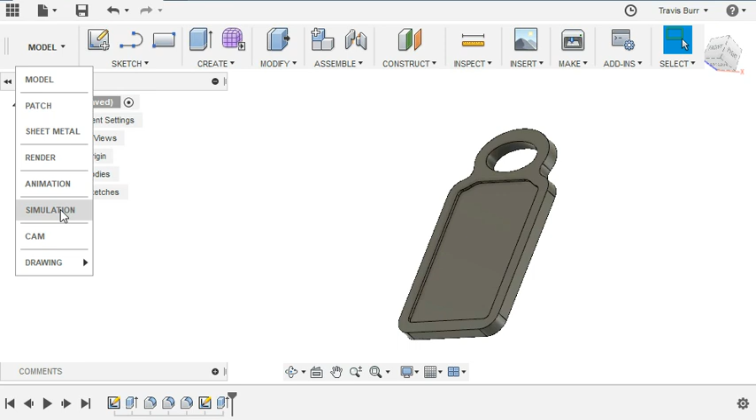The next step of the CAM process is to start generating some tool paths and things to make this, or to cut this cutting board out. What I'm going to do is go to Model and select CAM. You'll notice this right away changes over all of my toolbars, so I've got a whole new scope of Fusion 360.

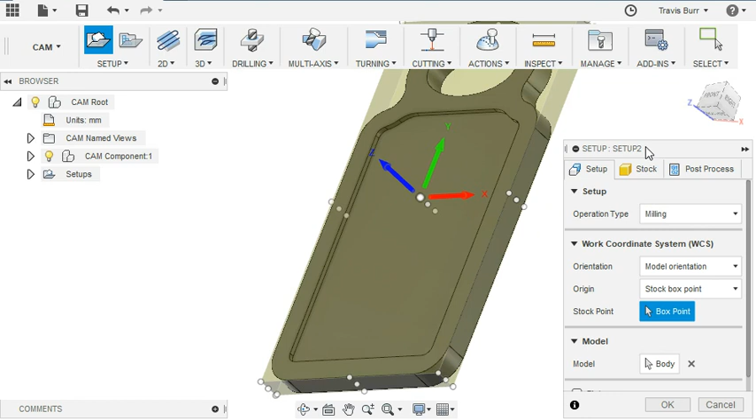Now, first thing I need to set up is the material that you're going to be using. I'm going to double click on Setup and it's going to bring up this box. First thing, type of operation: milling, that's using our router; turning, that's using a lathe; and cutting, that's laser cutting, water jets, things like that. But we're milling, so we can just stick to that one.

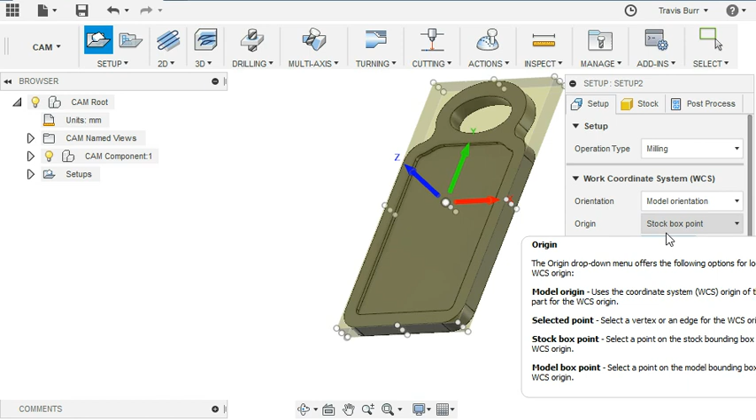Now, work coordinate system, model orientation. You've got some other options there, but we'll just leave it as model orientation. And stock point — this is where we want the XY to start. Remember when we were drawing it, we used this point down here. I can click on that, and it's going to move that point there, so I know when I'm zeroing the machine, I need to zero it on the corner of my wood. That lines everything up. For Model, I could have just clicked on model body, which would have set this up the same way.

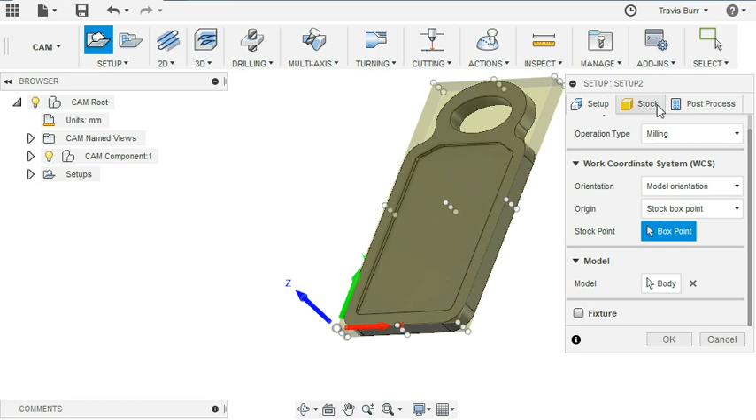Next thing, I'm going to go over to Stock. Now it says relative size box — I'm going to set this to a fixed size box. It just changes the dimension a little bit, but now I can see that my width is 180. Well, I know that my stock's 190, so I can just update that.

It says my y-axis, my depth, is 340. I'm going to just leave that as is for the time being. And it says my z height is 20, but I know my depth, or my z height, is going to be 19, so I can update that as well. You can see everything's centered — model position is centered, meaning the model is centered within the stock.

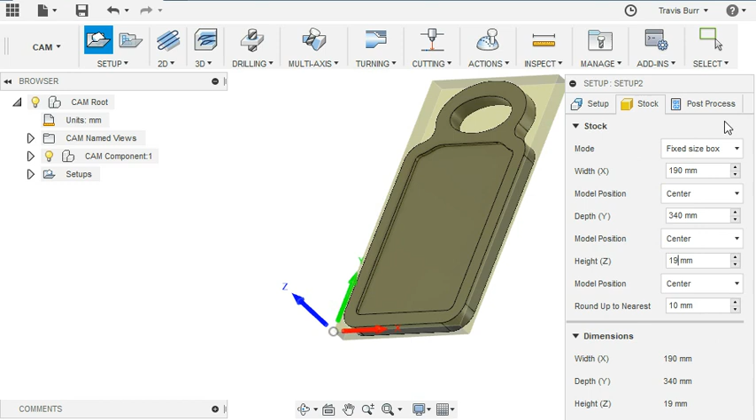We're not going to worry about post-processors right yet, and I'm going to hit OK. So now I've got my setup, I've got the material in place.

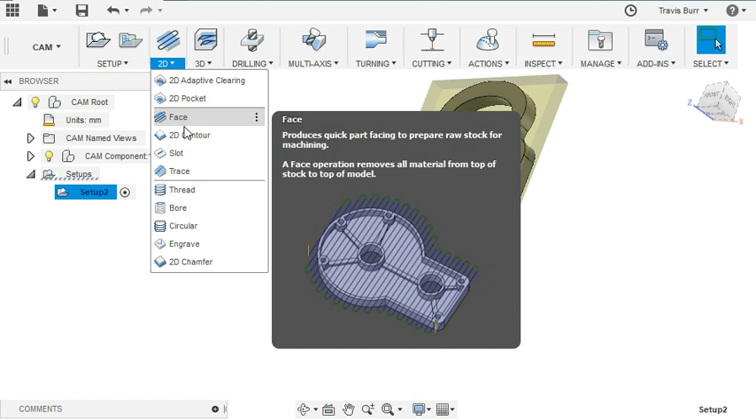After setup, we need to take a look at the tool paths. If I click on 2D, I've got a whole bunch that we can use: 2D adaptive clearing, pocket, face, contour, slot, trace — a bunch of different things that we can do. I'm going to start off with just a 2D pocket. This is a very simple CNC operation. If I click on that, it's going to bring up another window.

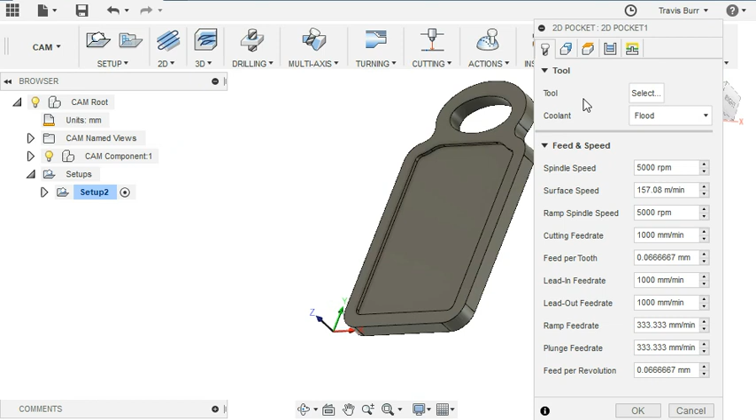It starts at the tool, and we're going to work our way down. For the tool, I'm just going to click on select, and that's going to bring up this dialog box. Now there's a whole bunch of predetermined setups that we can use, but it's all for metal — we're going to be using wood. So I'm just going to click on the plus for new mill tool, and that's going to bring up this dialog box.

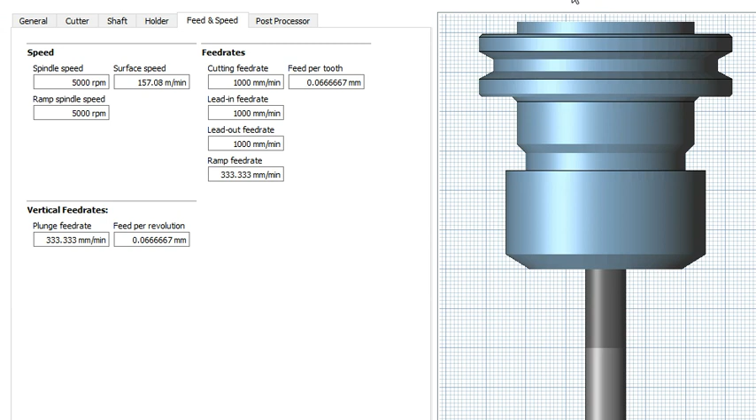So we'll start over at the cutter and identify what the cutter is that we're going to use. We're not using a ball mill, we're going to use a flat end mill. A lot of the ones we've got in the wood shop right now are single flute bits, so I'm just going to set that to 1. Our units are millimeters, I don't want any coolant, and we're using high-speed steel — there are other types you can use, but we're using high-speed steel.

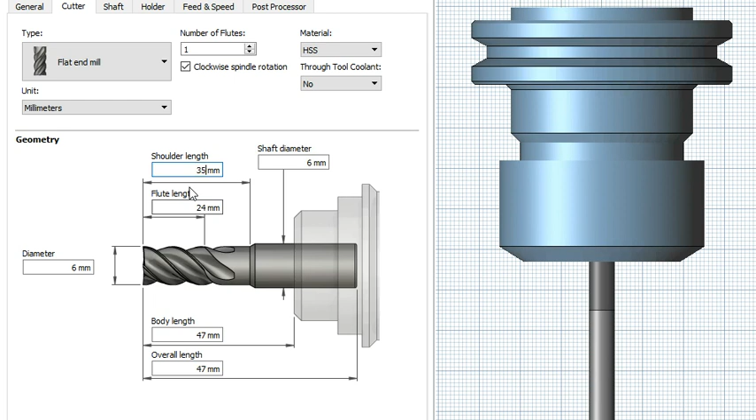The diameter of the bit we're starting with is going to be 6 millimeters, so I can just change that. The flute length on this bit is 24 millimeters, and the shoulder length is 35 — just a basic setup of what our bit looks like. You'll see over here on the tooling it updated as I made these changes. Say you want to make a change, maybe I got this wrong, it's 16 — you can see right away that it's changing size. So this is just identifying what the bit looks like.

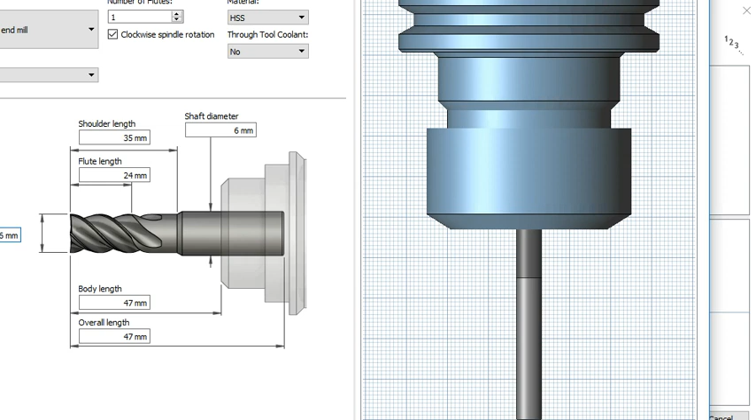With all of that set up, I'm going to move over to feeds and speeds. Now Fusion tends to set things up for metalwork right away. We're going to bump up the 6 mil bit to 20,000 RPM, which is really fast, but our machine's capable of it. If your machine's not capable of that sort of RPM, make sure you're setting this to what your machine's capable of.

The cutting feed rate that we've been cutting with on our machine is 3,000 millimeters per minute, and that's giving us a feed per tooth of 0.15. That's about what we're looking for, but if you're using a smaller hobby machine, you might want to bump that down a bit to like 0.05. The machine we're using is quite powerful, so these settings are fine.

If you're a little hesitant, you can also turn your feed rate down to a lower number. Say if I was using 10,000 RPM instead of 20, I would set my cutting feed rate at 1,500. If I had this down to 5,000 RPM, I would be setting 1,000 millimeters per minute. So there's some changes here, but for the machine I'm using, our Omni with a 6 kilowatt spindle, 20,000 RPM is fine, 3,000 millimeters per minute is going to work, and 0.15 millimeters feed per tooth.

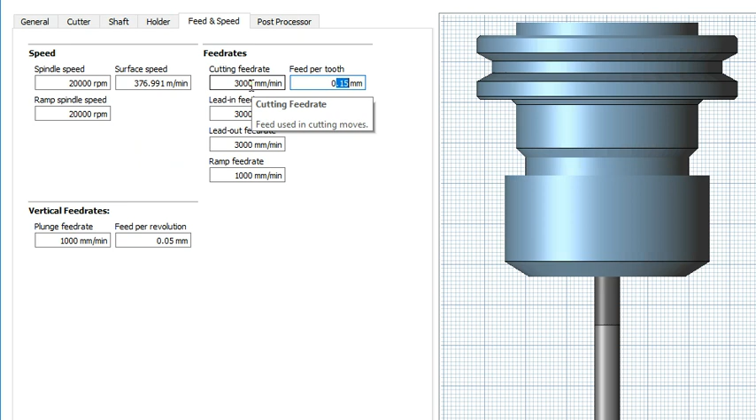But if you want to be safe, slow this down to what your machine's capable of, and slow your cutting speeds down. If you really want to test this out, you can start off with 1,000 millimeters a minute and just try a couple cuts, ramping the machine up as you get used to it.

Once this is all done, I'm just going to go OK. We're going to save that tool to our project, and hit OK again. Now you can see that the tool is showing up here.

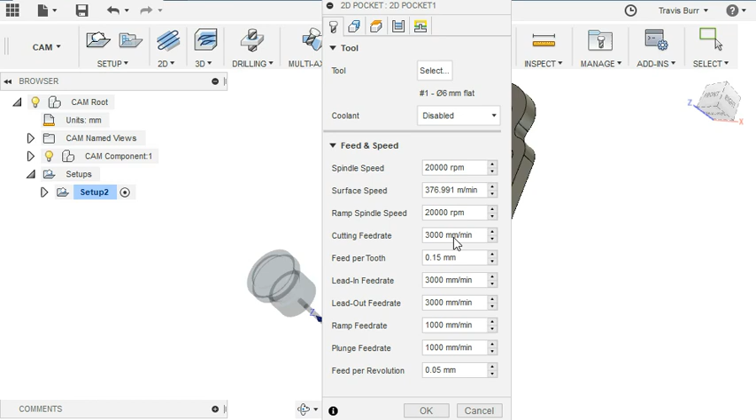Looking at our window here, I've selected my tool, check. We're using a wood router, and we don't need any coolant, so we'll just turn that off. Our feeds and speeds are set from that last operation we just did, so I'm not really concerned with anything here—just a brief check over. We've got our spindle speeds correct, what we just set, and our cutting feed rate set, so we're good here. We can move on to our next tab.

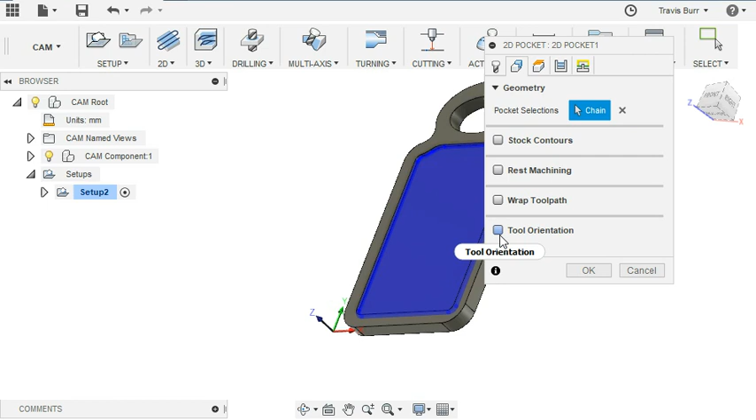Now our next tab is geometry. It says pocket selection, nothing is selected, so I need to select some geometry. If I come in here and click on my pocket, it says chain, and it selects everything that I need to do, which is good. That's what I want. You've got some other options here, but we're not going to worry about those right now—that's for another tutorial down the road.

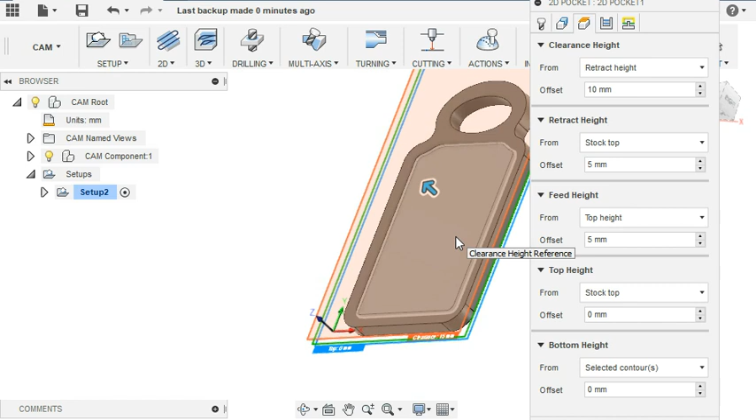Next tab over is my heights. It's kind of funny—everything else is top to bottom, but here you need to think bottom up. So bottom height, this is the depth we're cutting down to. Remember how we did this extrusion to 4 millimeters? We're going to set it to the bottom of that. I'm going to say selection, zoom in, and select the bottom of that, and you'll see the bottom now is at -4. So it's gone from the top down to the level we want. We could change this depth depending on what we want to do, but that's appropriate for now.

Top height, stock top, well, 0 mil—that's where the top's going to be. 5 mil for our feed height, 5 mil for our retract height, and our clearance height is 10 millimeters. So this is feed and retract height—how high the bit is moving above the work when we're not cutting. We set it up to 5 so we know it's going to clear everything as it goes around.

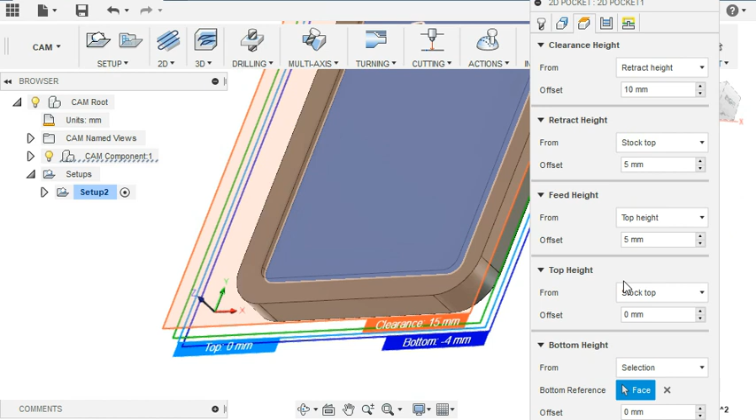Next one we want to take a look at is our passes. I'm going to uncheck stock to leave for this, but say we were working with metal or a hardwood and really wanted a fine finish, we could leave a little bit of stock and come back at it really slowly and just clean it up nicely. We're going to undo that.

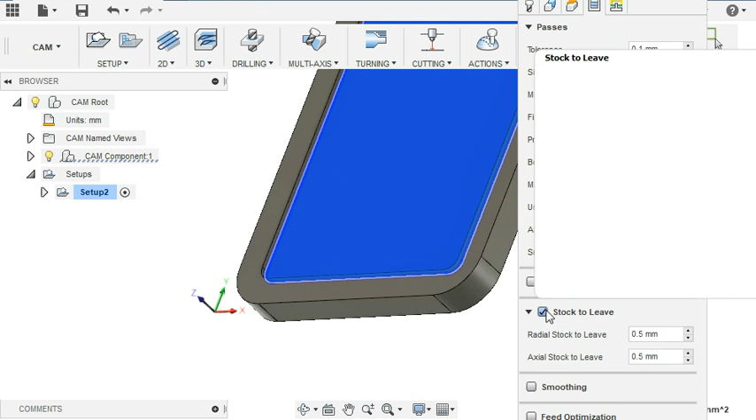We also have an option for multiple depths. 4 mil is okay for our tooling, but if we were taking more, we could set multiple depths. Say we want to do 2 passes, I could set a depth of 2. In this case, we don't need this—we'll just set that to 4 and uncheck multiple depths. So just some basic stuff in there.

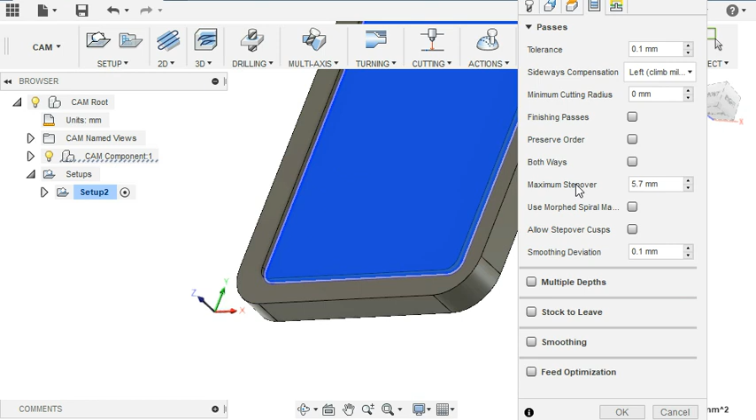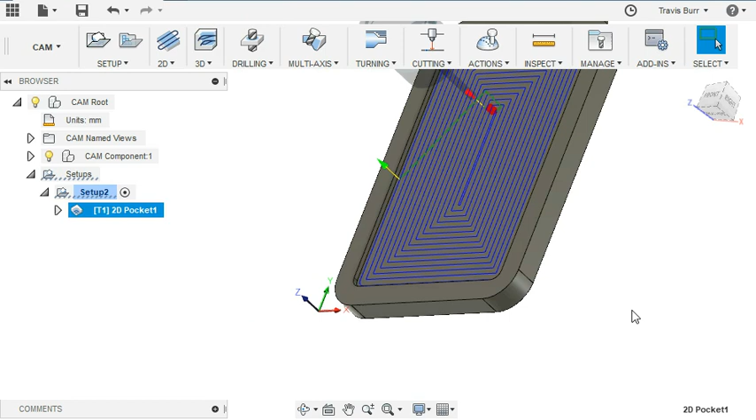The last one is our ramping in, and I'm not really concerned about linking the leads and transitions or the ramp. With all that done, I'll minimize some of this stuff so we can see what we're doing, and click OK, and we should see a tool path start generating. If we look at it, you can see this blue line symbolizing where that tool is going to go—it's coming in here, wrapping around from center out, and leaving there, cutting it out.